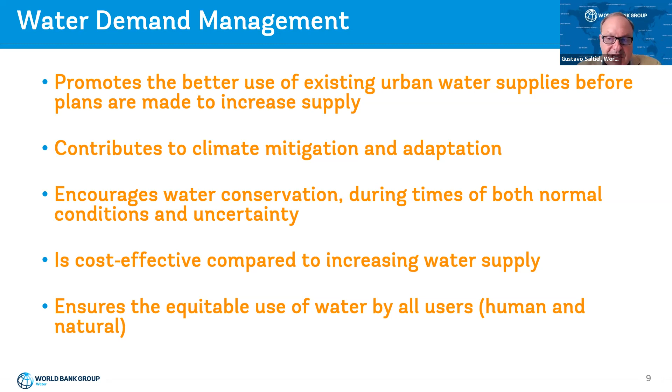So I would like to focus now on three instruments: utilities, policies, institutions and regulation, and circular economy. The utility of the future is a key instrument of the bank to transform utilities, to move towards a future-focused utility, and therefore the idea of the utility of the future, which provides reliable, safe, inclusive, transparent, and responsive water supply and sanitation services.

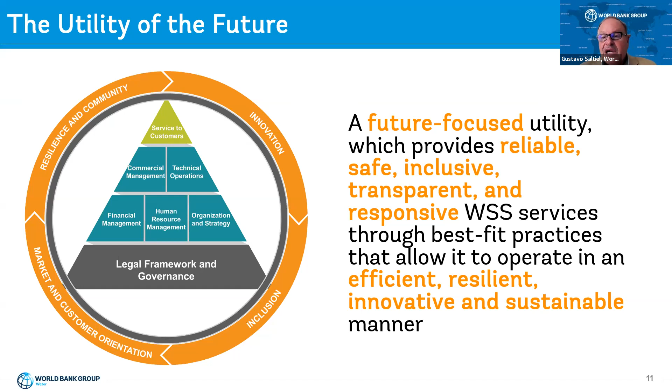The second is what we call policies, institutions, and regulation. We have developed a framework 5 years ago to address in an integrated, coordinated manner these three dimensions: policies, institutions, and regulation, because they are intertwined. We are applying this framework in 20 countries and drawing lessons from its application. Also, there is a renewed interest given emerging priorities of intergovernmental relations.

In many developing countries, national governments play an important role in addressing water security, and therefore the relations, both fiscal and institutional, between national and subnational governments is critical. Financing and resilience are new dimensions. And as I mentioned, there is an emerging need for PIR: policies, institutions, and regulation.

The day zero events that I mentioned before, many of them showed lack of proper planning and policies and incentives. Financial viability of service providers to address these challenges is also low. COVID-19 has shown the need for more focus on integrated approaches, and the fact that many people do not have access to water and sanitation services demonstrates that investments are not enough, also because countries are not able to execute the approved budgets for the sector.

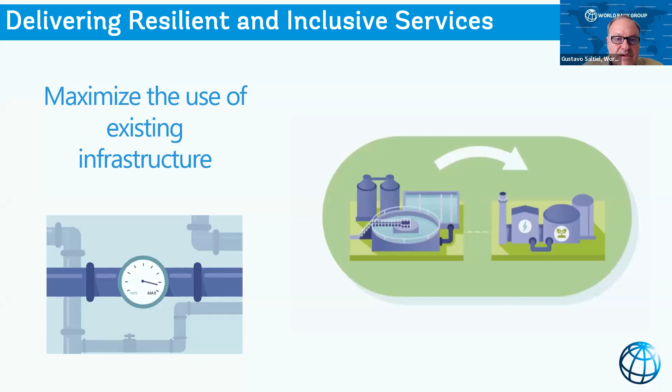This includes maximizing the use of existing infrastructure, reducing non-revenue water and demand, and increasing efficiency of all processes, including sources of water with different risk and cost profiles and vulnerabilities, and nature-based solutions as I mentioned already. We're bringing all these tools and approaches under this integrated approach that we call WICER.

Before concluding, I also wanted to show you the results of a recent survey carried out among policymakers in 86 countries and published by the Global Water Policy Report, Listening to National Water Leaders, in 2021, that demonstrates that PIR, policies, institutions, and regulation, is the missing link for resolving some of the chronic challenges undermining water security.

Policymakers identified the fragmentation and lack of coordination of water institutions as the most significant problem that countries need to address, above investments, data, citizen participation, etc.

So to conclude, demand management is critical to achieve urban water security and to address the challenges imposed by climate change, urbanization, and economic and population growth. It's a key component of the World Bank's integrated green, resilient, and inclusive approach to water management in cities, and needs to be embedded in the policies, planning, utilities turnaround, financing, and regulatory incentive structures, using the different tools and innovative approaches that will be presented in the session today.

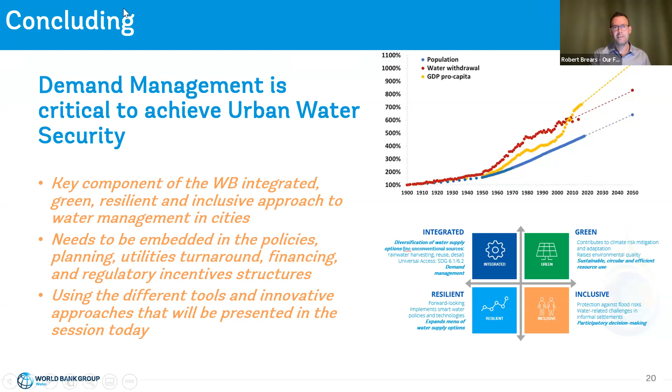Perfect. Thank you for the thorough overview of the topic. My presentation will be on the role of demand management inside urban water security. So firstly, I'd like to discuss the key elements of achieving urban water security, followed by demand management instruments available to achieve it.

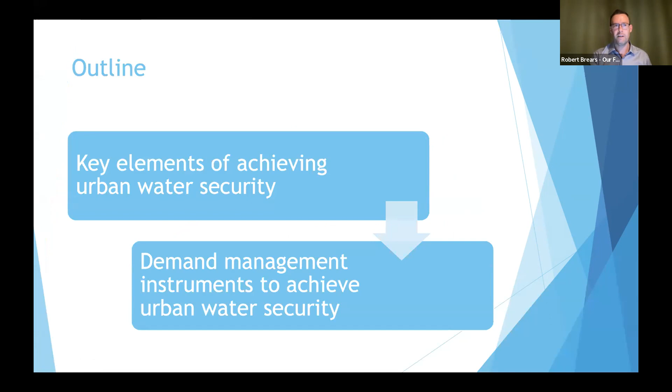So just a very brief overview of what the term urban water security really means. It has three key elements to achieving it. First, access to safe and sufficient drinking water, at an affordable cost, in order to meet basic needs including sanitation and hygiene, as well as safeguarding health and well-being. It also means protecting livelihoods, human rights, and cultural and recreational values.

One of the critical things about urban water security is that nature plays a critical role and has equal value to humans as well. So urban water security also means preserving and protecting ecosystems, which means allocating water and ensuring management systems maintain the health and functioning of ecosystems and the services they provide. While we require water for ourselves, we also must have water for nature to ensure those ecosystem services are able to be provided for current and future generations.

Demand management itself is about promoting the better use of existing urban water supplies before plans are made to increase supply. It promotes water conservation during times of both normal conditions and times of uncertainty. And we obviously know that the costs - economic, environmental, and political costs - are a lot lower than just supply side management. It also means ensuring equitable use of water by all users, both humans and nature.

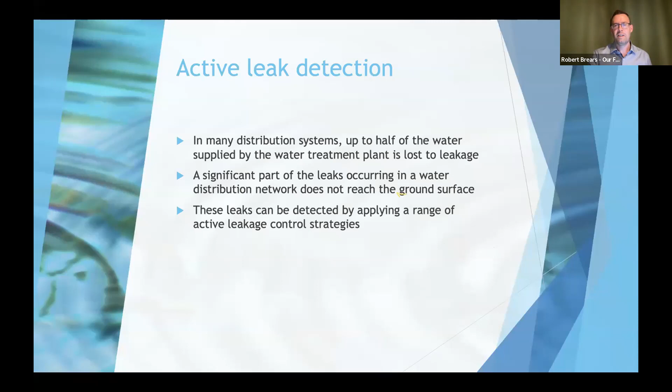And then we turn to the regulations and ordinances. In many cities around the world, they have water conservation temporary ordinances, known as water bans, during summer times, hose bans, and car washing bans. We also have regulations which restrict actual water usage in total in buildings and new developments.

So the water conservation ordinances come in a temporary version that are basically restrictions on non-essential residential uses. It could be restrictions on commercial uses, for example, a ban on using water for cooling purposes. Meanwhile, permanent water restrictions include amendments to building codes, such as requiring installation of water-saving devices, for example low-flow toilets, in new developments.

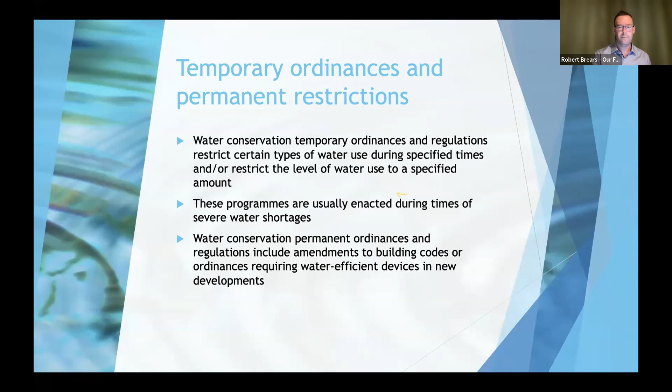And of course, demand management also means developing alternative water supplies. By that we are talking about rainwater harvesting systems, on-site grey water harvesting systems, and other types of systems that enable water utilities to reduce the cost of treating potable water for non-potable uses.

Water recycling systems can be developed for suburbs for various non-potable uses. They have purple lines for washing cars or irrigation systems. Rainwater harvesting systems can be used for irrigation on commercial properties, a landscaping example, and that reduces the need for having potable water supplied by the municipality for non-potable uses.

Basically, why are we treating top quality water that's for drinking purposes just to water grass and plants around a building? On-site non-potable reuse systems use grey water for multiple different uses, for example toilet flushing, general washing and irrigation systems.

A little less known part of demand management is source water protection, protecting the source of the water itself before we start developing new supplies. Source water refers to sources of water that includes rivers, streams, lakes, reservoirs, springs, and groundwater. These are the sources that provide drinking water as well as a source of water for private wells.

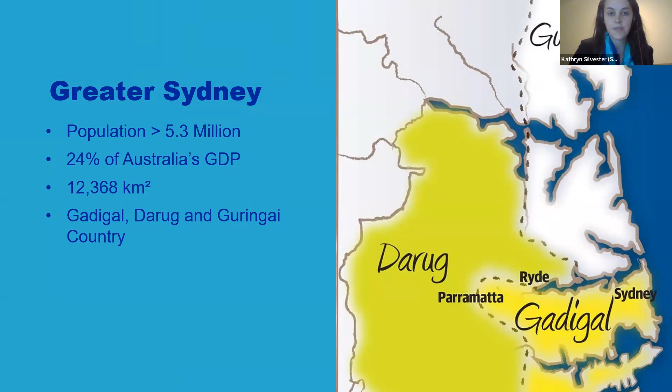Yes, most of Sydney's water comes from dams. For those who aren't familiar with Sydney, we've got a population of around 5.3 million people, responsible for around 24% of Australia's GDP. We're quite a large, expansive city, and our traditional countries are Gadigal, Darug and Guringai. So that's the area of Sydney there.

In terms of water supply, we have one desalination plant with an average capacity of 250 megalitres a day. We also supply some recycled water at 35 megalitres, but our total water demand is much greater than that. So you can see that the majority of that is met by 11 major dams and 9 water filtration plants.

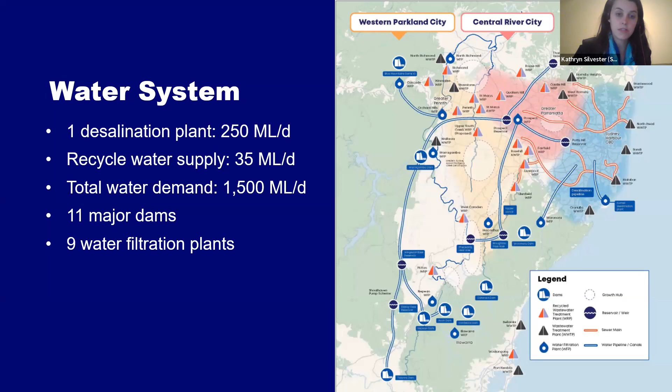You can see through that picture that a lot of our water supply is not climate independent. We're very much reliant on rainfall, and as a consequence we're quite vulnerable to drought, and there's limited groundwater options for Sydney in terms of drinking water supply.

We got quite good at demand management, water conservation, implementing water efficient equipment and washing machines, and influencing a lot of policies for new developments.

But if you look at the more recent drought between 2017 and 2020, that was very, very quick. We had all these drought response plans in place, but what we learned was that storages can deplete more rapidly than previously observed and planned for. Had that severe drought sequence continued with the same intensity, the timely delivery of new supplies to avoid severe water restrictions or running out of water would have been at risk. We were at risk of running out of water if that had continued on that trajectory, and didn't have enough time to build anything.

We've got a water conservation program in Sydney Water, and I just wanted to call out that the program's not just about using less water. It's about using water more efficiently and more effectively. We want sustainable and efficient management of our resources, having water available for the environment and other purposes, resilient and water smart communities, and enabling livability outcomes for the community.

Particularly in Western Sydney, which can be up to 5 degrees hotter than Eastern Sydney, with climate change we're going to experience hotter summers and more extreme weather. In Australia, heat is actually the biggest climate killer, so we get a number of people who die during heat waves.

So using water more effectively for greening and cooling in the environment is really important. Conserving water is important, but our water conservation program is not just about using less water, it's about using water more effectively.

We have water conservation in our operating license. It's a requirement for us to maintain a water conservation program, which is really important, and it's good to have that as a hook to make sure this program continues. At the moment it's quite wet, so it could be easy to shift focus, but as I showed in those last graphs, it's really important to continue working in this space.

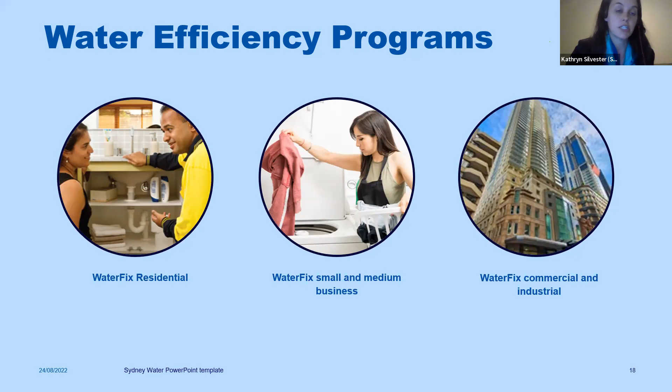So we've got a recent program with childcare centres, supporting them with more efficient washing machines. We do a targeted based approach, looking at different sectors and how we can help support them save water. I can share more information about those programs in the chat.

We also have a community awareness program, which can be quite broad, but we can use advertising campaigns and target different community groups, which can work really well - works less well when dams are full. So you need to be clever about when to implement those sort of campaigns, and when the community is going to be open to that sort of messaging.

We have school educational programs and engage with communities at a grassroots level, which is quite effective in supporting that understanding of the water cycle and the value of water and how it's important to save water. But there's also lots of different other messaging and education through that avenue.

And then there's also the media coverage on saving water. So Robert was talking about leak detection dogs, and Sydney Water, we've got a couple, but it's been a really good mechanism to talk to the community about how Sydney Water are trying to save water and reduce our leakage, and how it's important that we all pull our weight as well. That's been a good talking point, as well as a good way of finding leaks, because they're pretty good at it.

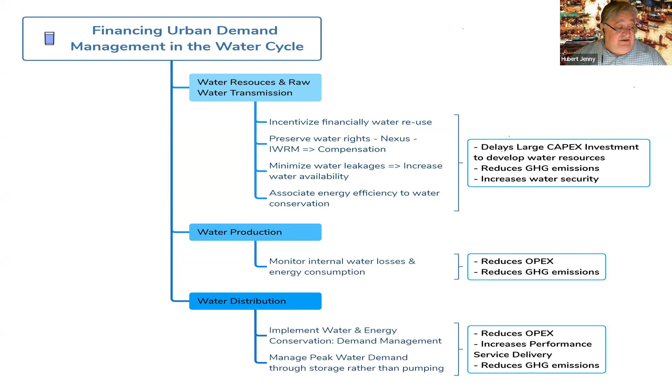And on the water distribution, I'm not going to go into detail, but Robert talked about it, Sydney Water also. And basically, the end game is we want to increase the performance, the efficiency of the service delivery for the user. Let's not forget that this is a service business. We're basically delivering a service to people. It's not about only infrastructure. It's about, at the end of the day, a service. And if we can do better as a public service, that's good.

So we have a few barriers to look at. Most climate smart utilities don't implement urban water demand management. I talk about it. There is, in developing member countries of the World Bank and the International Financing Institutions, the capacity of the utility company, very poor capacity, very good people, but they don't know where to start. And I had some projects where I was scratching my head and said, okay, what do we fix first?

Do we fix the finance? Do we fix the production? Do we fix the distribution? It's a bit overwhelming. Then there is the regulator, and most often you don't have a regulator. So you have to work through regulation by contract. It's not ideal, but you need something.

And then you have the user perspective. And I remember working in one country where basically I was telling them that we should implement customer service. And he said, okay, what is this? And he said, well, you know, we send them a bill every month. So that's not what it is. We need to take care of the user. And what Robert was talking about, the advantage of smart meters, providing information to the water user on the pattern of water consumption, is very important so that we can do water conservation and demand water management.

So we need incentive, we need access to finance, and a lack of understanding of the water sector from the regulator, from the utility, and from the user. There is also a perceived high risk for the water sector, but not for energy.

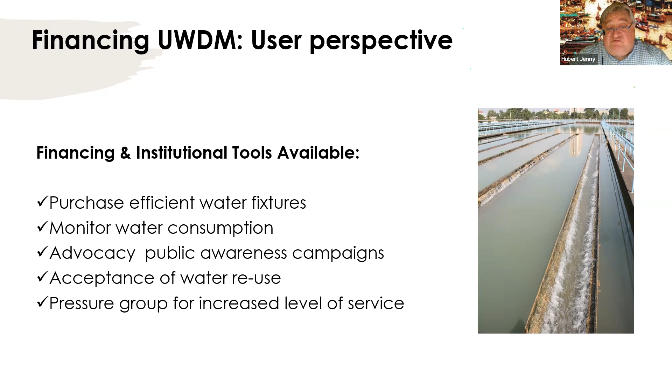Also, we talk about water reuse, and I call it the 'yuck' factor, acceptance of water reuse. You have the NEWbrew in Singapore, which is a beer that is made out of recycled wastewater. And this was done as a marketing ploy in order to build more acceptance from the population, and also pressure group from the water user to increase the level of service.

So from a regulator perspective, basically they can work on taxation in order to incentivize water conservation, implement those water fixture rebates through the water tariff or through the local tax. They can set up special funds.

They can promote public-private partnership and private sector participation. They can work on national programs for advocacy. We talk about the water saving fixture rating. They can push for targeted subsidy if they need a bit of time to build financial sustainability, and they can enforce block tariff in order to incentivize water conservation for people.

So I'm going to skip this slide, but basically say, if you're a private company, you should have full control of what you are trying to do in order to operate and maintain, and that is also true for regulation—basically you are reporting key results against your business plan. I'm not saying that the water company, public or private, should have a free lunch, but they basically have to report against an agreed and approved business plan.

It can be 1 year, 3 years, 5 years, 10 years, you pick and choose. And increase MERV, which is monitoring and evaluation, reporting and verification, as well as disseminate the result.

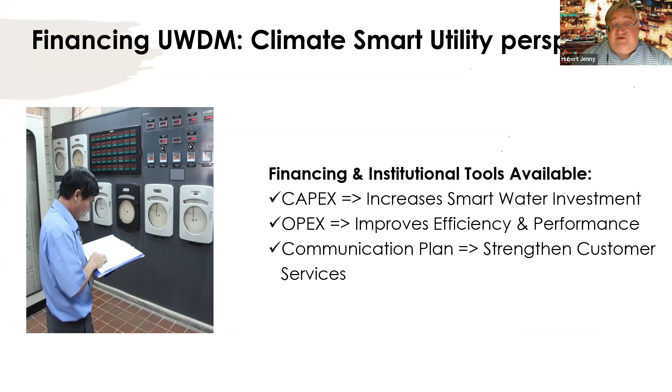Now, from the operator perspective, basically the capital expenditure can increase smart water investment in order to have more savings, water and energy saving—I like to combine both—as well as working on the operating expense to improve the efficiency and the performance of the service, and communicate in order to strengthen the customer service.

I'm going to pass because I see that time is passing, on the risk, but this is the usual suspect from commercial, political, regulatory, financing, ESG, and reputational.

Different financing vehicle, PPP, I have a slide after, I will go into more detail. Blended finance, we talked about it. I mentioned first loss risk sharing that can be applied to demand management, and also green, water, or blue, and climate bonds. So basically additional financing instruments that can be applied to the sector.

Let's not forget that water demand management is not like infrastructure. Infrastructure, you want long-term financing. But for demand management, you can have short-term financing because the payback of the investment can be less than 5 years, most often less than 3 years, and sometimes within 1 year. So this is basically a different type of model.

I think everybody here knows that for any of those contracts can include demand management clause, and it's up to the regulator to enforce those, and the international financing institution acting as the big brother, as the advisor of those regulators, have a major role to play.

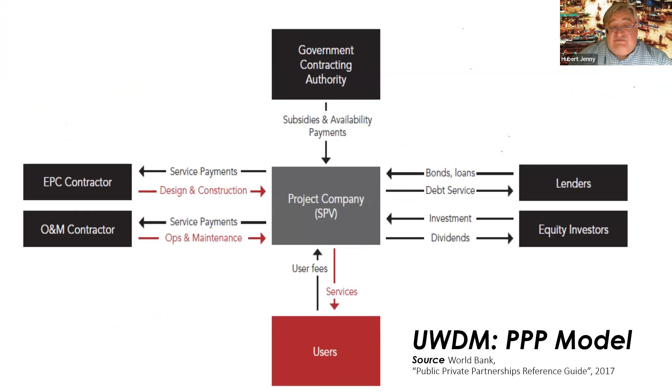I'm going to skip this one and work on the next two.

This was promoted by the government of Netherlands within the frame of the Water Operator Partnership. The Netherlands were financing technical assistance in order to establish and define the baseline. Once the baseline has been defined and agreed, issue a performance-based contract that is output-based, structured either as a public-private partnership or asking the public utility that is commercially autonomous to implement the output-based contract.

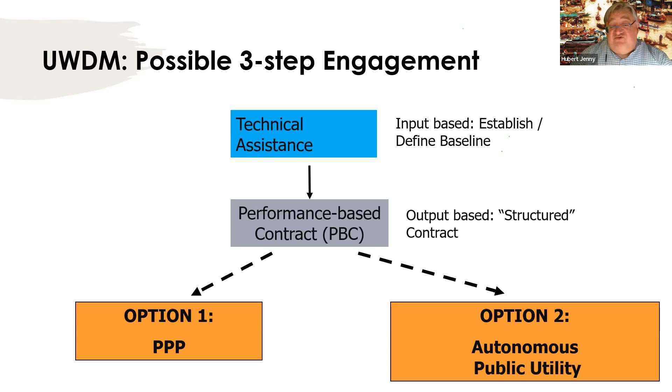IFC for the World Bank, Private Sector Operation Department for Asian Development Bank.

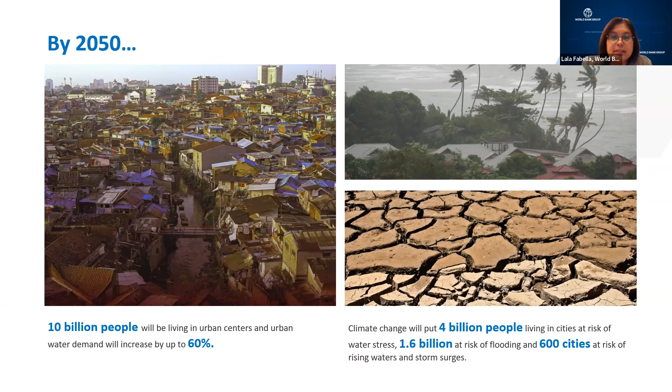This city also has to face a lot of typhoons, as Metro Manila encounters a lot of typhoons throughout the year, so it has to be very resilient, as well as resilient to earthquakes.

So how then do you secure a city like Bonifacio Global City? You saw this before in Gustavo's presentation -- the vision for water secure cities, where water services, water supply, water use are integrated, green, resilient, and inclusive. This is not talking only about water supply, but about water resources, wastewater management, flood management, and everything that has to do with sustainable use of water resources.

Part of looking at water secure cities is, or the backbone is, the integrated urban water management. And there are many options to do this, and you've seen some of the examples earlier. We can look at nature-based solutions, flood management, pollution control.

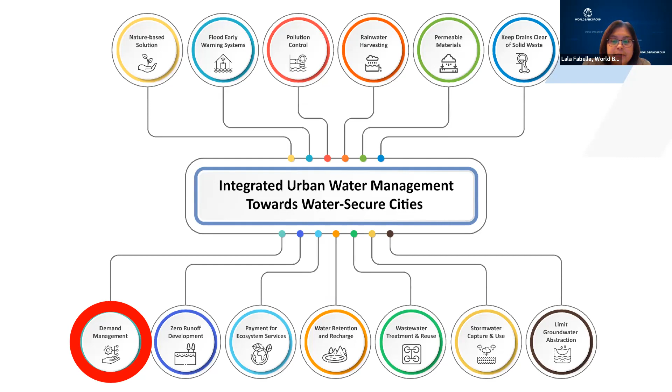But in this particular discussion, we've been looking at demand management. This was also mentioned by Robert, the difference between the traditional approach for urban water management and the IUWM approach. Traditionally, hydrologists and water resource engineers would look at increasing supply for managing urban demand, adding additional surface water sources, increasing the intakes, developing different systems like desalination, increasing reservoirs, constructing new treatment plants, and expanding the centralized network.

The IUWM approach looks at the demand side, and not the supply side. In the demand side, we look at diversifying and preserving supply, improving efficiency, and managing demand.

Diversifying and preserving supplies would look at storage, groundwater recharge, catchment management, stormwater capture, and more decentralized local distributions to extend coverage. For improving efficiency, this is where utilities come in to ensure that existing assets are maintained and rehabilitated, there's reduction of non-revenue water, and essentially optimizing the use of existing water treatment plant capacities.

Managing demand means for non-potable uses, essentially using, aside from piped water, fit for purpose water, and then using other sources of supply like rainwater and grey water recycling. Catherine talked about information education campaigns on water conservation, as well as the policies on tariffs and fees, which Hubert and Robert talked about earlier as well.

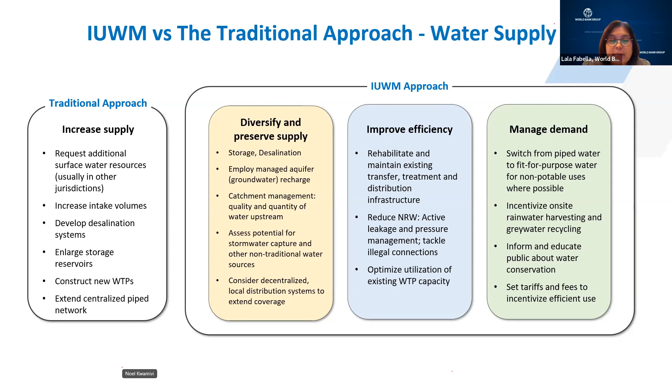So the way forward is to look at, in broad strokes, the four crucial elements to urban water demand management. Policy and regulation would provide the incentives and the enabling environment to make this possible. Utilities are at the forefront of urban water demand management, as shown by Catherine and Sydney Water. The private sector is important because of igniting knowledge sharing and driving technology and innovation. So we'll take a look at each of these crucial elements, starting from policy and regulation.

A lot of these were discussed by Robert and also Catherine. We look at policies on water pricing, like the block water tariff, which promotes water conservation, incentives for utilities, for example, to reduce non-revenue water, and private companies to go towards green buildings, plus policies on water recycling, stormwater management, and rainwater harvesting.

Just this morning, we had this session on wastewater reuse, treated sewage effluent reuse for the Philippines, involving different policymakers. So a very interesting discussion as we move forward on sewage effluent reuse. It has been mentioned, the advocacy, education, and awareness on water conservation, which engages stakeholders towards conservation and efficient water use. And financing all of these through, for example, targeted subsidies, even tax incentives. We talked about water efficiency labeling, the fixtures, the appliances, and incentivizing the use of all these to conserve water use.

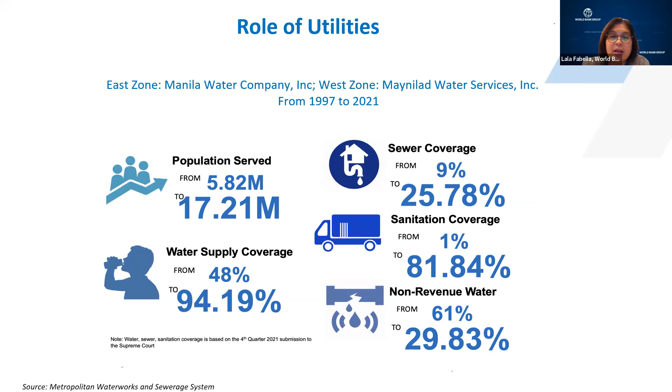Looking at Manila Water specifically, the East Zone concessionaire of Metro Manila: in 1997, only 26% of customers had 24-hour water availability, with the rest on intermittent supply. By 2021, almost 100%, 99% of customers had 24-hour availability. During this period, no major dam or new water source was developed - it was really non-revenue water savings that allowed this expansion and improvement of service. Non-revenue water was reduced from 63% in 1997 to 15%, saving roughly 700 million liters per day over the years, which was used to supply water and improve and expand service coverage.

I'd like to mention the World Bank tool for utilities, which could help ignite transformation. A lot of utilities exhibit subpar performance. We have a tool now being used in 24 countries and 65 utilities worldwide, called the Utility of the Future tool. It's a diagnostic and planning tool allowing utilities to look at past performance and maturity, challenge the present, and have a future perspective - not just looking at current performance but where it wants to go, for instance on essential processes like commercial management and technical areas, as well as future-focused innovation, inclusion, market orientation, and resilience. This is a planning tool utilities can use to ignite transformation, and it's publicly available.

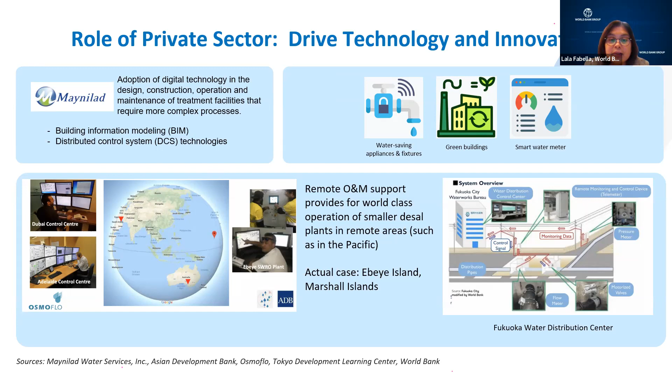To summarize, the four key items moving forward for urban water demand management are: policy and regulation to ensure practices are sustainable and maintained over time, as Catherine mentioned; utilities like Sydney Water, Manila Water, and Maynilad Water which have shown the way forward; and the private sector for knowledge, technology, and innovation. These are the four key areas to move forward towards urban water management.

This is all integrated into, hopefully, a water secure cities vision for integrated urban water management - to have an integrated, green, resilient, inclusive use of water resources in cities. That summarizes the whole session, and we thank you for joining us. Thank you very much.